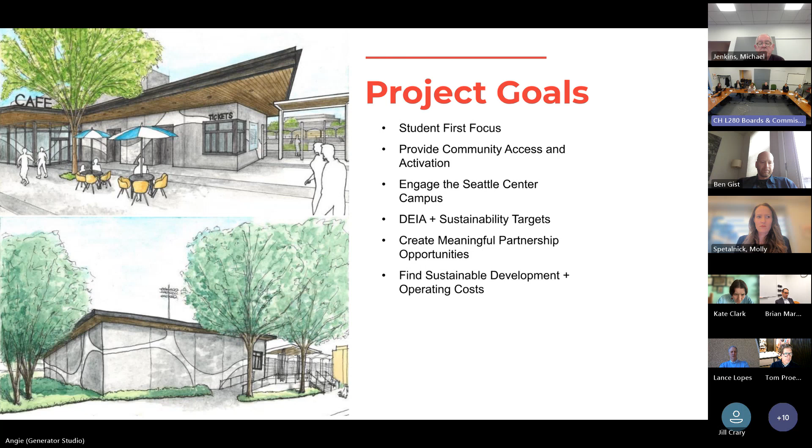And then our project principles: to develop a world-class stadium for Seattle's youth and community, an outside-in design approach, which really focuses on integrating into the Seattle Center context, providing community spaces supported by flexible amenities.

Celebrating students through art, activation, and technology, and then, obviously, restoring the memorial wall and providing it a pride of place it does not have today.

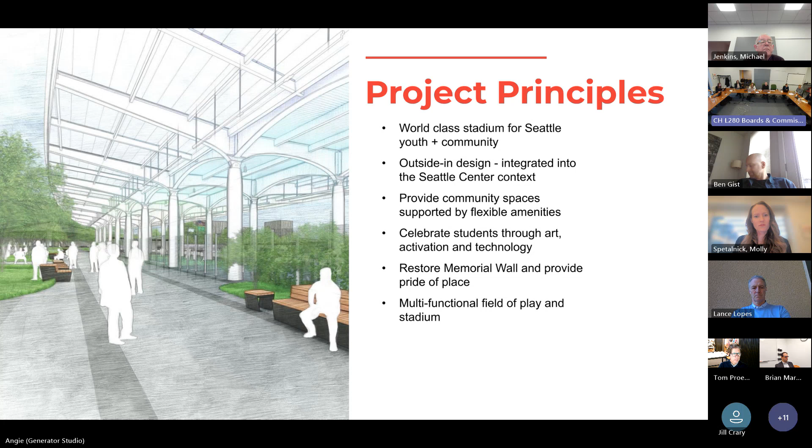And then, obviously, we can't lose sight of the bare minimum here: creating a multifunctional field of play and stadium for the Seattle Public Schools. Throughout the stadium design piece of this, we're going to call back to these goals and principles.

So getting into the stadium program and design, we're going to start with the recommendations we received from this group following our October presentation. We wanted to make sure we gave this a close look as we jump into what we're sharing today. As Brad mentioned, continued engagement is key for this project.

Evaluating feasibility, including public art infrastructure costs in the project budget. Study and clearly identify pedestrian and bike routes. I know Barb's going to show you some exhibits on that today.

Continuing the Indigenous engagement. For our corner buildings, consider opening to the exterior, evaluating the impact on the Center, and consider material choices for friendliness if programming doesn't allow for opening.

And then, sixth, enhancing the community engagement, again, what Brad touched on with their extensive efforts there.

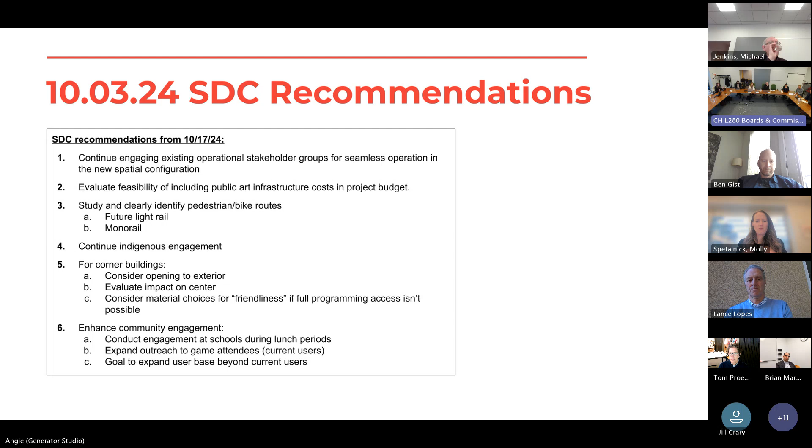So looking at our corner pavilions, the objective here, and we touched on this last time, was really to push these pavilions to the corners of the site so we can maximize the flexibility of our concourse, while also allowing for porosity and activation to the campus, creating these large openings to the east, south, and west.

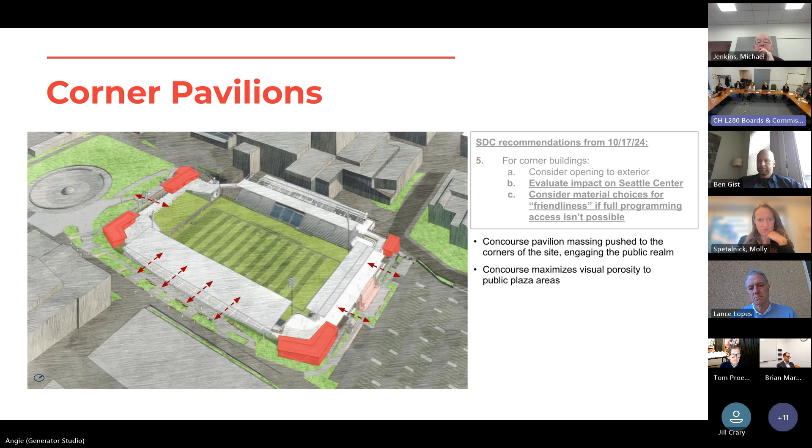So looking at these corner pavilions from the campus-facing side, a big development since we last met is these walls - we've studied the use of precast concrete, which has an extensive use on campus and a history within the center as being a cost-effective, expressive, and quick to erect and construct technology. And engaging with the campus with that building material and also the expressive nature that the forming of that concrete allows for.

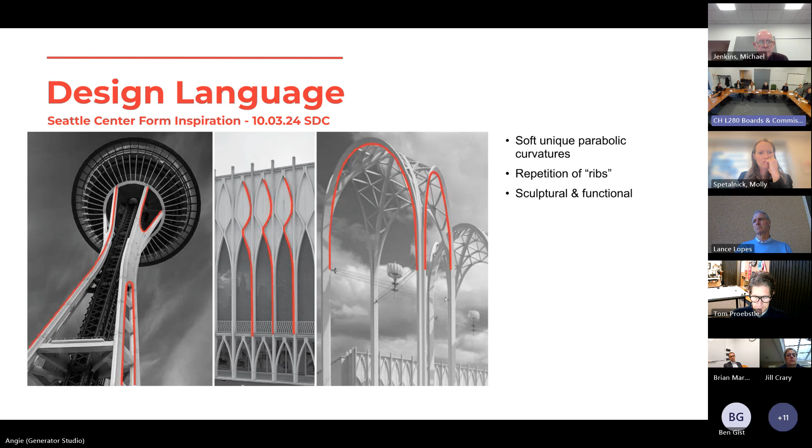So a callback to our last presentation where we talked a little bit about our canopy design and the inspiration that they've taken from a larger center context with these expressive sculptural and also functional, in some cases, forms. And so for these precast walls, go to the next.

We're taking a similar approach and studying the use of precast throughout the campus, both in structural and expressive ways. Came across this quote from the progress engineer from the original World's Fair construction site, where they really focus on the beauty that's achievable with a simple technology, and that beauty does not have to come at a cost. And I love this quote where they call the architects adequate and the engineers brilliant.

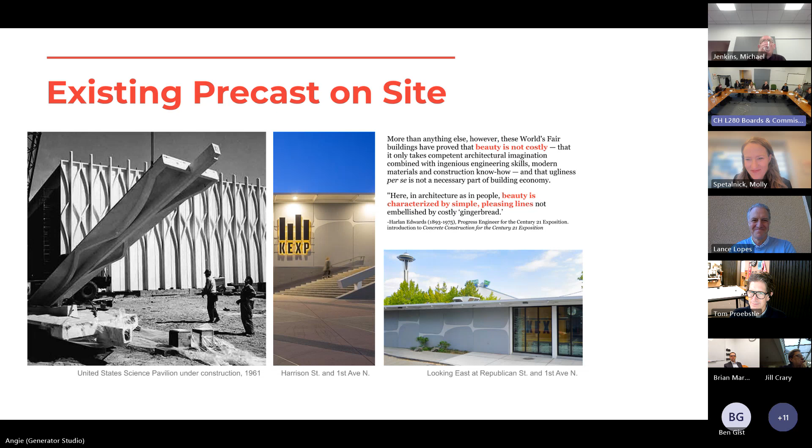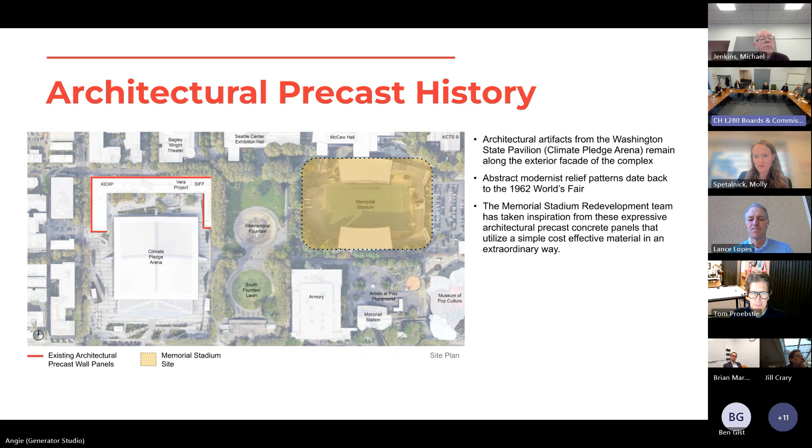So a little bit of a broader look here, looking kind of zoomed in on our site, but also including Climate Pledge and larger campus context. We've highlighted in red here the use of one of these precast panel types. That's really a simple system - it's a panelized precast panel with an inset at its exterior face that allows for forms to be created in a very simple, cost-effective way.

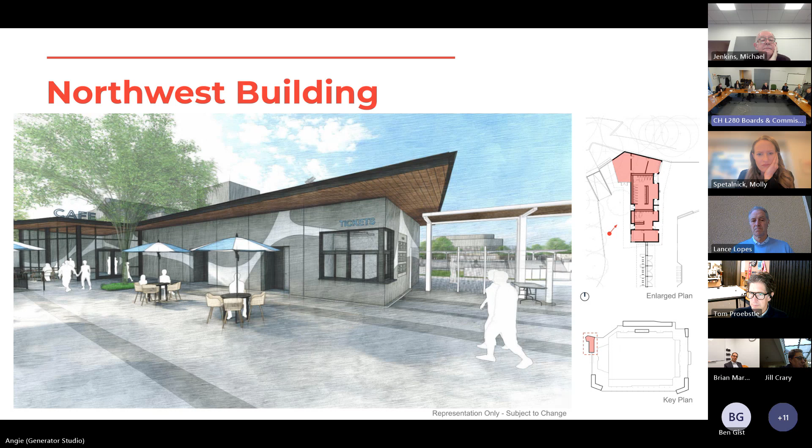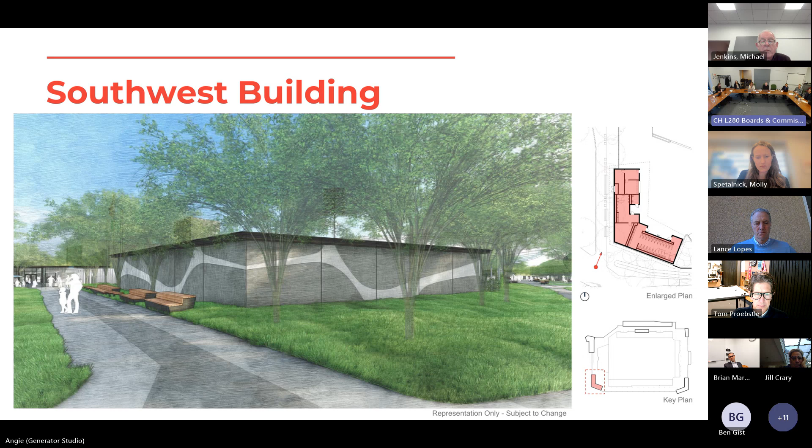We jump to the southwest - again, the same pattern wrapping around the corner of that building. I think the next slide is kind of a backed up version of this view where you can start to see Harrison Street, that roof canopy, and if you look really closely, Climate Pledge Arena in the background there.

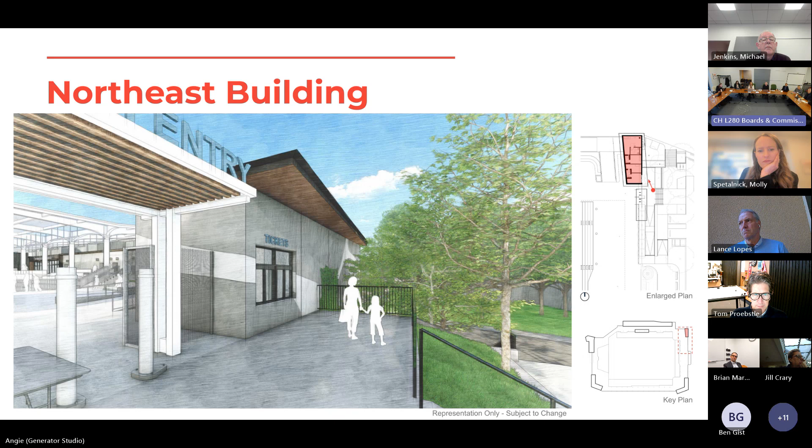And then this is that northeast building, which is actually a pretty modest little building, a little ticket window and some services on the inside of the concourse.

And so the interior faces of these pavilions take on a completely different life. And this is where we did touch on last time, where we are looking to provide these full-scale art walls for students to have representation and expression opportunities, celebrating those students through art, activation, and technology. Again, a project goal.

These spaces would flank our community spaces that are at each of these four corners and meant to be flexible amenities.

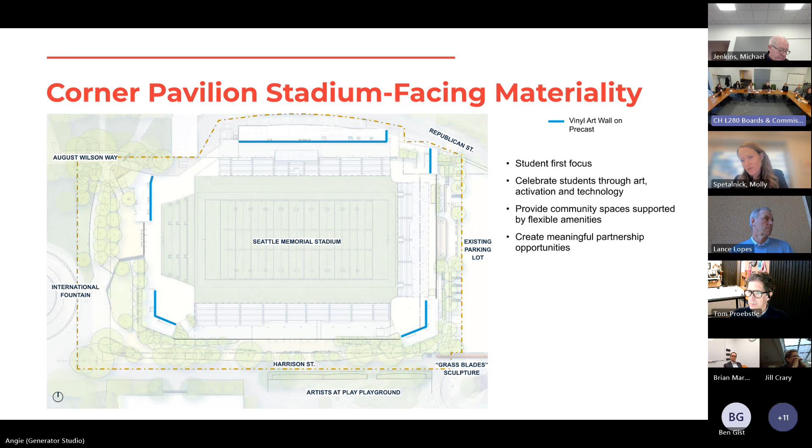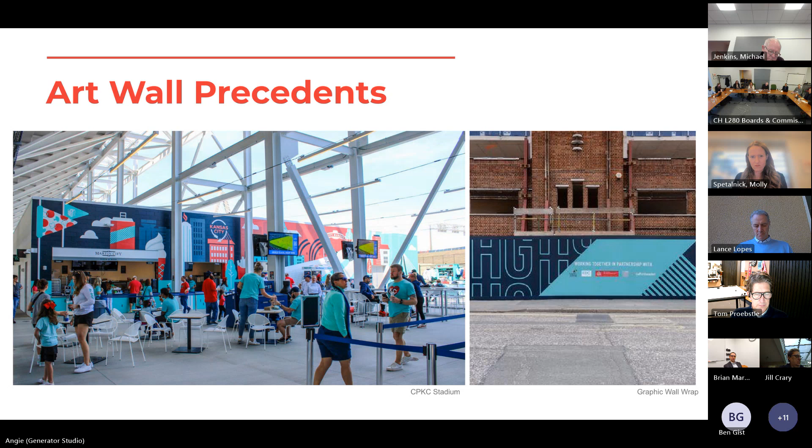Looking at other applications, this is kind of a collage of some what I would call art walls, a few back home in Kansas City, a few from here. And I think across the country, we're starting to see a lot of this application of large scale art on surfaces that weren't really intended for that, but they do take on their own life. What we're talking about here is a day one application of this type of graphic and art.

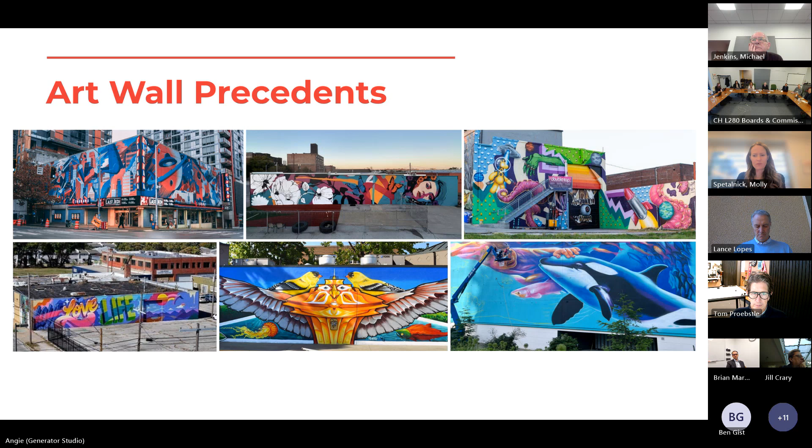We're going to jump to the west exterior activations, and I've included here some of those recommendations from October. The big ones we address at this corner of the project are listed here: the feasibility of including public art into the project, and considering opening to the exterior with these corner buildings.

We talked a bit about it already, but the cafe at the very north end of this building is a new activation that would not be operated by the stadium. It would be operated by a third party. But we see that as a great opportunity at that corner to really engage with the campus, facing out toward the international lawn.

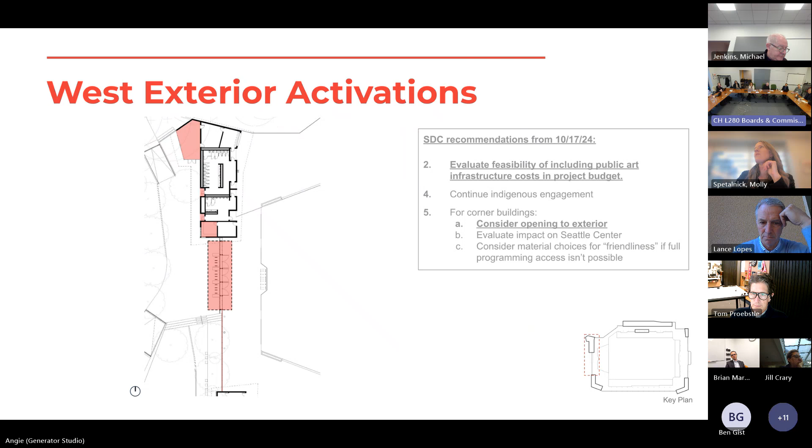We also have restroom entries to this building, highlighted in red. Then we have a large entry gate along this west concourse that would be more focused for community events. The SPS gates that will be used are along the east, which is how they operate the stadium today, and that'll remain. South of that, you can see a red line, a section of fencing we're looking at for a custom patterned application, an art opportunity for an installation, potentially through an indigenous group here in Seattle.

So we'll look at each of those pieces here. This is that west entry. We kept this gate structure pretty simple. It sort of is an extension more of the fence line, that entry gate, than it is the architecture, giving a little coverage for staff operating these gates and for queuing. You can see here too, we've identified a location for a donor wall just adjacent to this entry.

This is that fence panel installation opportunity I mentioned. It's a bit of a tricky corner here because of the site grading. Where we're standing in this view, we're about 7 feet above the concourse elevation. So with this fence, we want to have roughly a 50% opacity so that you're not getting what SPS would call a cheapskate view into the facility, but you're able to have a sense that there's an event happening and it's an active site on campus.

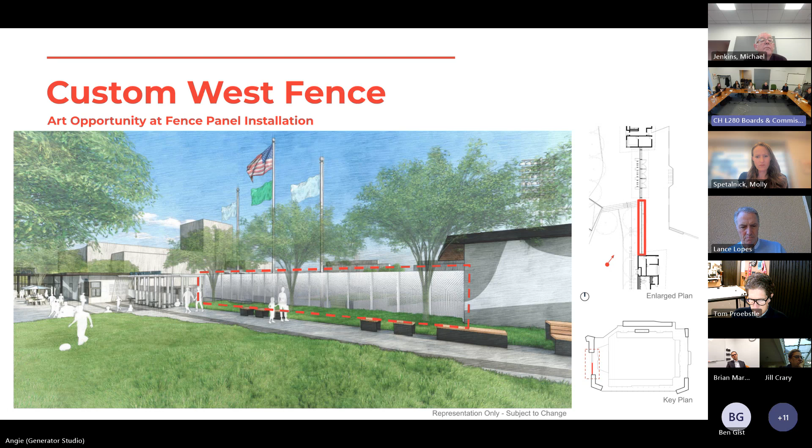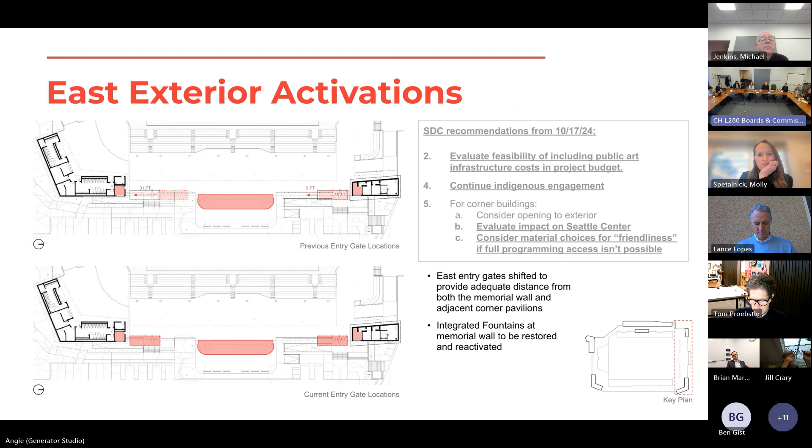Then we jump to the east side of the site, where there are just a couple of tweaks on this side of the project that again call back to some of the SDC recommendations and our project goals of giving Memorial Stadium a good pride of place. We've slightly shifted the layout - the two plans on the left show the upper as a previous layout, and the lower left is the updated layout, where we've shifted those entry gates away from the wall to give it a nice moment to itself.

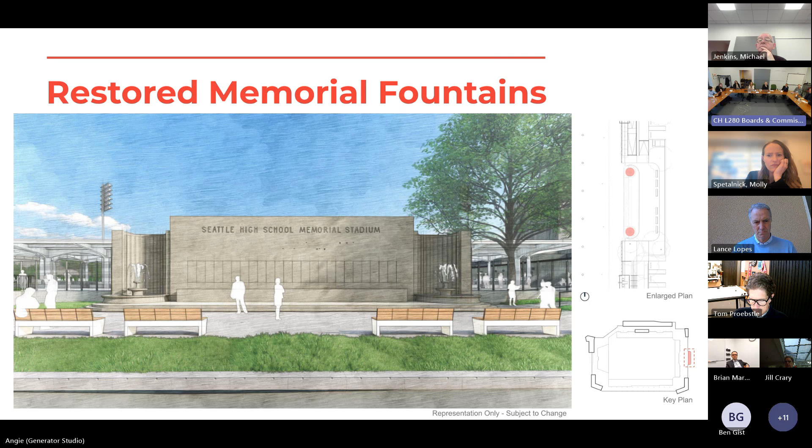And just a brief mention of the memorial wall itself. I know Barb's going to look at this a little bit later. Just a view showing that we've kind of cleared out space on both sides to really let it stand apart and have its own moment here.

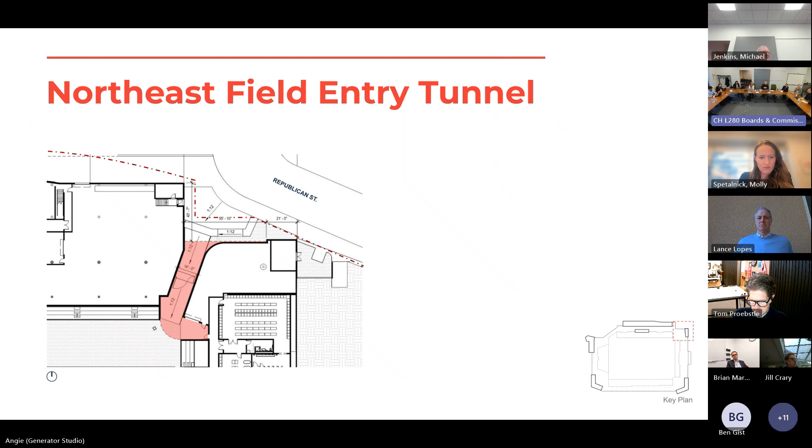Okay, so we'll talk a little bit about sustainability. As John mentioned in the project vision, sustainability has been one of our priorities on this project. As designers, obviously with the changing environment, it's important to us, but it's very interesting to hear from the students in our student engagement that it's something that's very important to them as well. In our previous presentations, we've had very conceptual ideas of how we'd achieve a sustainable design. And now we're at the point in our design process where we actually have requirements that we need to meet in order to meet code and in order to meet our LEED Silver goals.

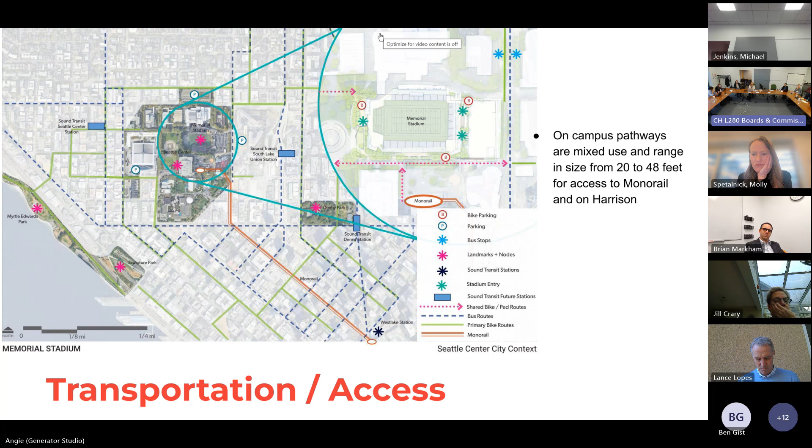You had asked us to talk a little bit about pedestrian and bike access to the stadium coming from the monorail and also from Harrison, and we've done a little enlargement here. I think one of the things about Seattle Center is it has these significant pathways which are not segregated by use type. So coming from the monorail and also Harrison, the widths of those vary, but they go from about 20 to upwards of 48 feet, and sometimes a little bit larger. So with the exception of when there's a major festival, free flow is available.

You also asked us to continue to work with Seattle Center on the issue of site programming, and also with the school district associated with that as well.

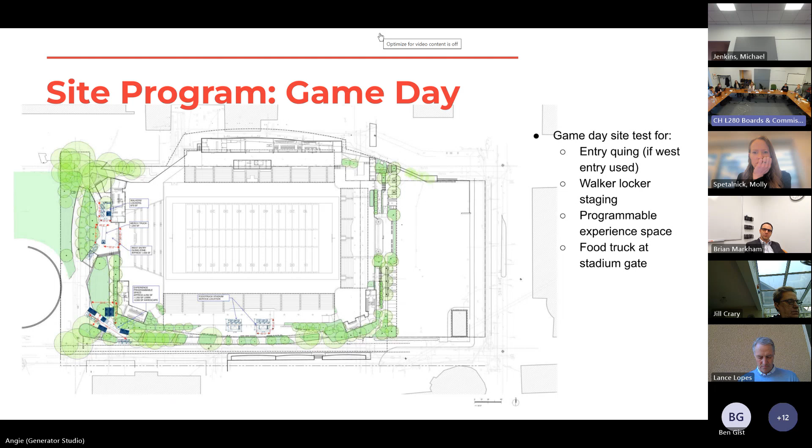We've gone through a process of really cross-checking the design against this array of activities. So we have a game day condition with things like food trucks and queuing areas. We have school events, whether it's a classroom, presentation, or performance. And Seattle Center festivals, using the Bite of Seattle as the basis for looking at this. With this particular study and layout, we're exceeding that current level of tents.

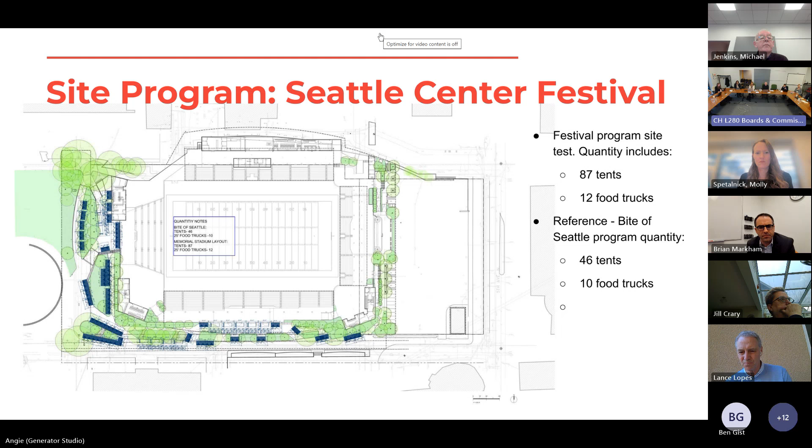We're going to be meeting again with the Seattle Center Event Group on the 23rd to cycle through that, and obviously these diagrams are a high level. They have been testing siting, etc.

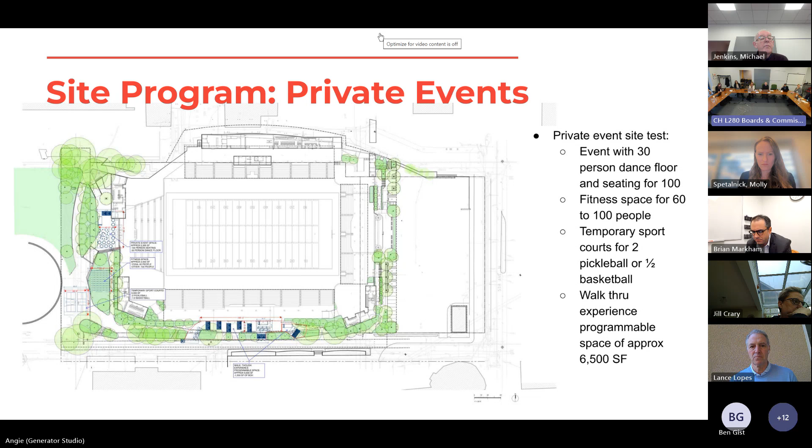Large events could be a beer garden or an event with a stage for 250 people. Private events could be a small gathering, use of the site for fitness, or a presentation of some kind. We've also been keeping track of vehicular movement through the site to make sure this is going to work well in the future and meet the demands.

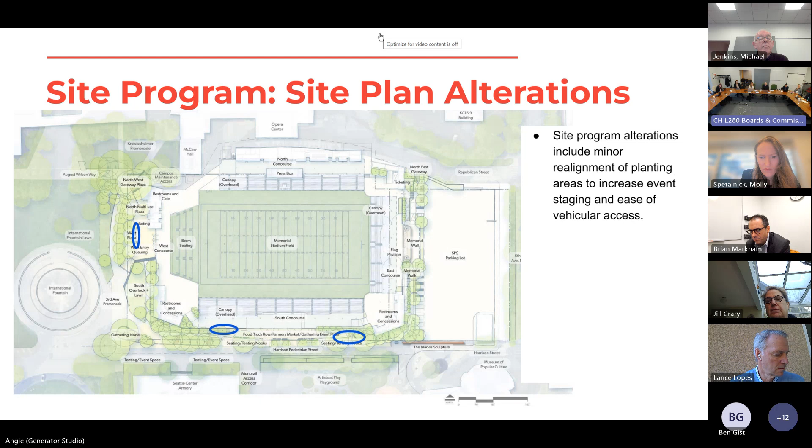I do want to note that there are three small areas where we are shifting pedestrian pavement to increase it in support of event use and vehicular access. So there are just some slight shifts occurring on this. Here's a site plan.

I want to walk you down through the 3rd Avenue Promenade. That has been asked as a question, and I think it's really quite interesting. So this sequence goes north, starting at Thomas. The configuration of this experience between Thomas and Harrison is one of a strong allee of trees, and it terminates at this interesting junction where Harrison meets 3rd.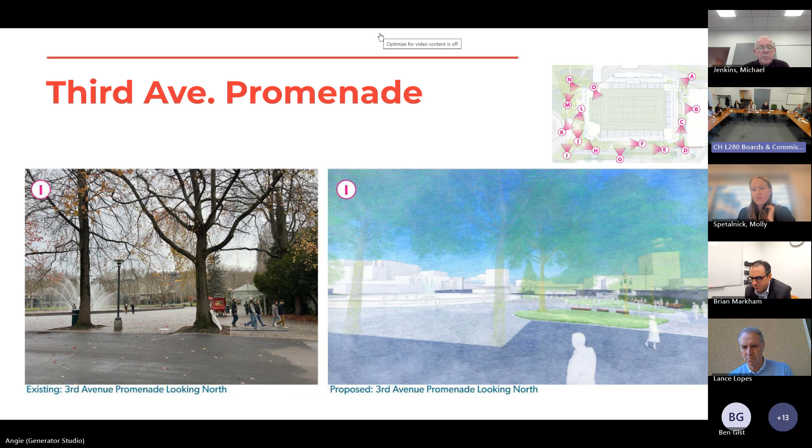And then you can see in the image on the right, this area really opens up. Much of the understory is going away. It's going to be a relatively low ground plane position, so as you walk up, you can really do a broad scan and select your path through. It really changes the relationship, I think, to some degree with the fountain, really bringing it in.

Now, this is if you were continuing down what is going to be an arced Third Avenue promenade, to the west of the current covered walkway. And again, the extension of the fountain lawn rolls down toward the stadium entry plaza. This descends down the slope at approximately a 4.5 to 5% slope and lands us at the intersection of August Wilson Way.

And that arced wall and arced trench drain of Kreielsheimer Plaza come out. So there is a call and response between the arc wall of Kreielsheimer Plaza and the one that we're proposing.

So we really have almost two experiential characteristics in terms of lengths. One, which is the strong allee between Thomas and Harrison. The second is between Harrison and August Wilson Way, which is really more of a landscape experience where the walkway is set into the rolling plain of the International Fountain. And then we have two knuckles, one at August Wilson Way and one at Harrison.

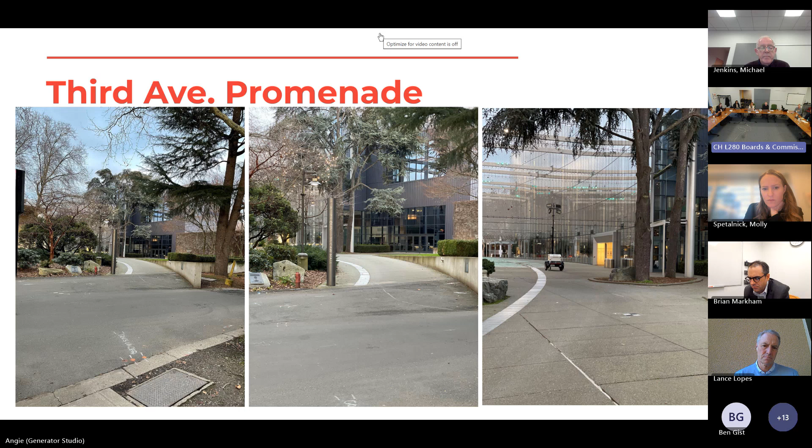Okay, we are going to go to a video. Can you take me to a video? So we all hold our breath.

Oh my God. So we did a fly through last time and found it really helpful, and before we go into the details of this, we wanted to do another one. So this reflects the changes.

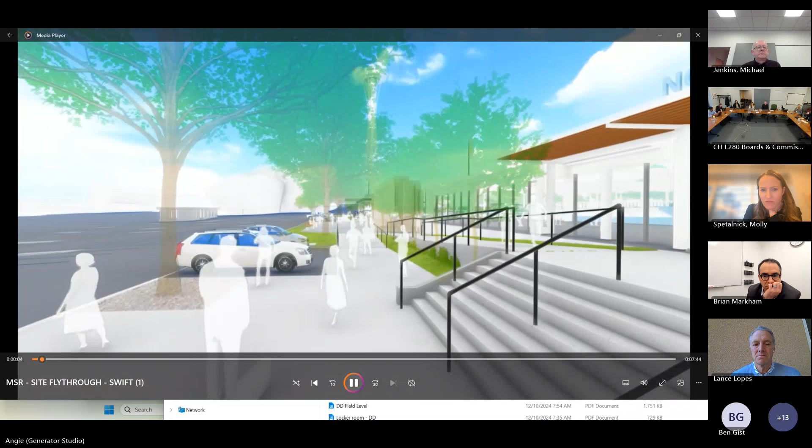We're starting in the northeast, walking to the south along what will be a community walk. You can see the Space Needle in the distance. We're coming up upon the memorial wall. We're going to rotate out. We were able to create a plaza in front of the memorial wall by deleting some parking.

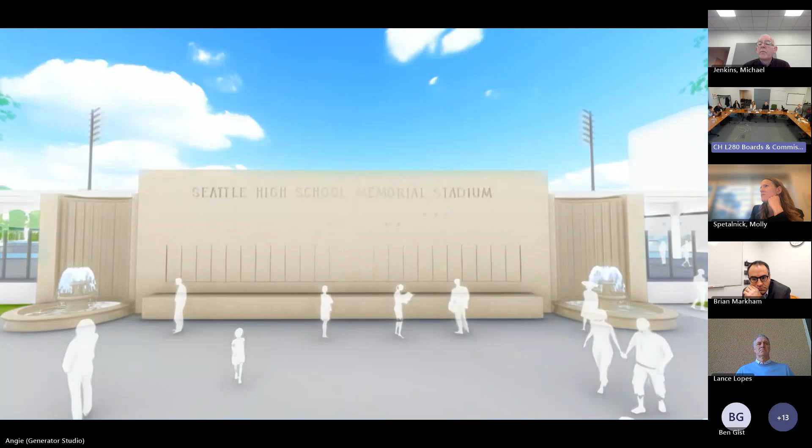And again, the grade change between the outside and the inside is roughly 4 feet, so when you're standing out in that plaza, you're going to feel a physical connection to the concourse. It's a really different circumstance. So we're continuing to the south. As John said, the entries have shifted, so they're more proportionally arranged around the memorial.

You can see seating steps, and this is kind of squished east and west for some reason. So you're continuing to walk toward Harrison, and again we have trees creating a separation between parking and the walkway. Now we're going to come to Harrison and do a rotation and begin to go down the Harrison corridor.

This sets you up for long views down that corridor of Climate Pledge Arena. So we have a corridor which is treed for entry movement and vehicular movement, and then this area adjacent to the fence line, which is set up for activities that support inside the stadium as well as outside with lots of seating.

You can begin to see some bands of pavement - we'll talk about that later. We're going to be doing a sequence of rain gardens in this planting area, and then there's a group of redbuds. You'll see an image of this later. We're going to be extending that line out so that Harrison has that as an identifying characteristic.

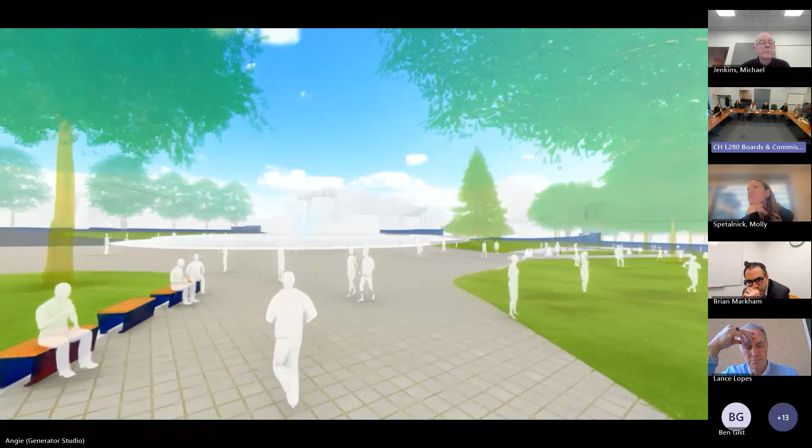It really brings that through to you, and you begin to see here a change in the pavement to a darker gray. We're saving all of the existing paving around the fountain and reusing it to bring it down Harrison to extend that sense of the fountain district.

So we're moving toward that, and we're going to begin to go down the Third Avenue Arc Promenade. There's grass on the right, and as John said, it is elevated, and that was part of those early conversations with you about making sure that that sense of the fountain district extended to the...

...toward the stadium. So we're dropping down the grade. The grade change varies along here, and it begins to come down to be almost at the same elevation as the entry plaza, and then drops below. But at August Wilson Way, it's about 2.5 to 3 feet lower than that entry plaza. So you still feel as if you're part of this larger area.

So now we're getting to the knuckle at August Wilson Way. August Wilson Way right now feels like a group of corridors that intersect at this location. With the cafe and the seating and creating a little bit more breathing space, keeping all of those large legacy trees, it really turns it into a gathering space. So it's a knuckle now.

So now we're going up that sloped walk, and you can see the lawn area on the right that is going to be used for event staging. This takes us into a smaller area that could be used for smaller events, and really, if needed, if you're doing a beer event, you could cordon it off to the entry at the stadium. Then the steps lead you up to that elevated grass plain, and again those are used as stadium seating, amphitheater seating, as well as a step.

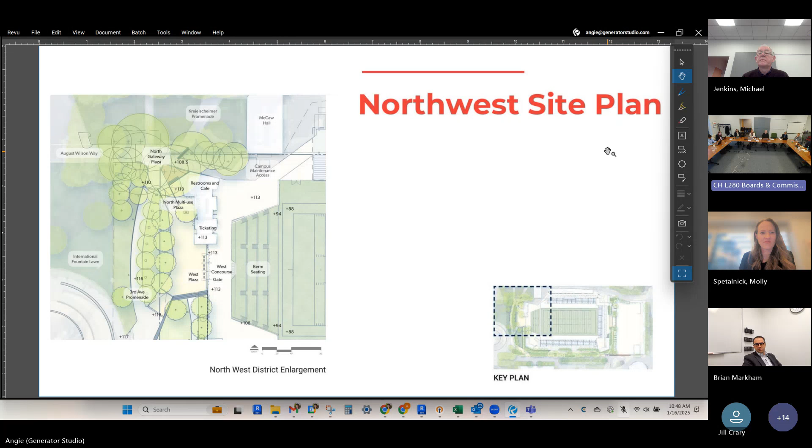Maybe keeps going. Okay, we're going to start in the Northwest. I've already talked about much of this, so what I'm going to do is talk you through a series of before and after images. If you were on the concourse, this is what you would see. Really, the lightness of that canopy, the ability to see underneath it, really changes your sense of views of those major landmarks.

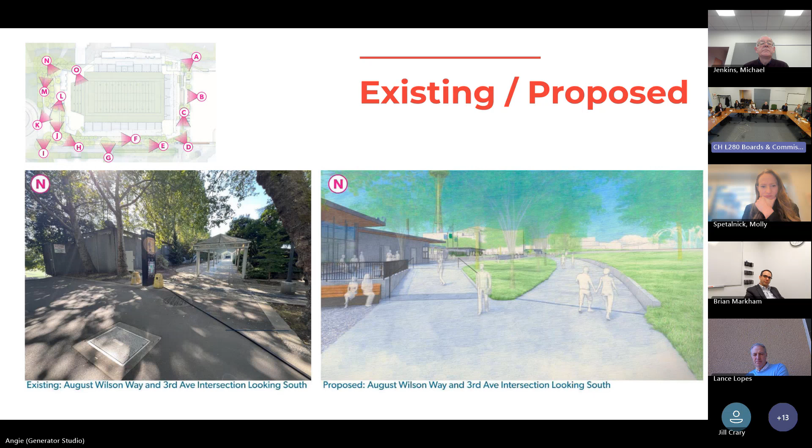I've talked at some length about this, but if you look at the image on the left versus the right, this is really beginning to calm down. All of the elements are there: claim back space, make it attractive and usable and engaging, and invite people to use it.

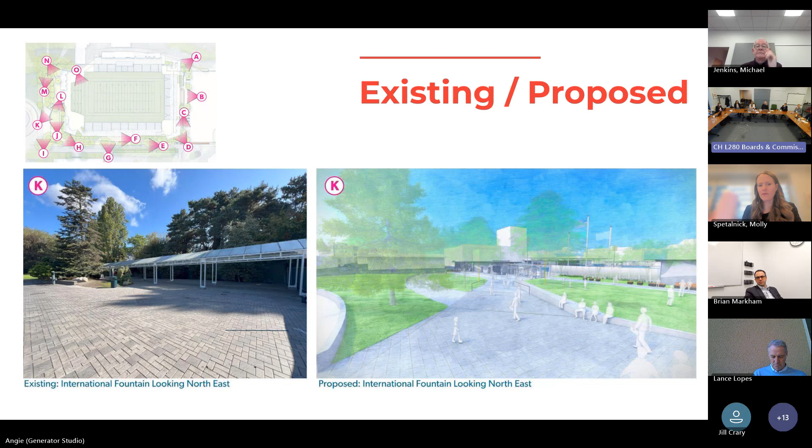Again, with the covered canopy gone and opening up that space with a connection to the fountain, this changes significantly. In the southwest corner, I'm going to walk you through again some more before and afters. If you are at the fountain looking toward the stadium, right now you have the covered canopy, the wall, the trees, which really constitute a barrier, and that's going to be all opened up.

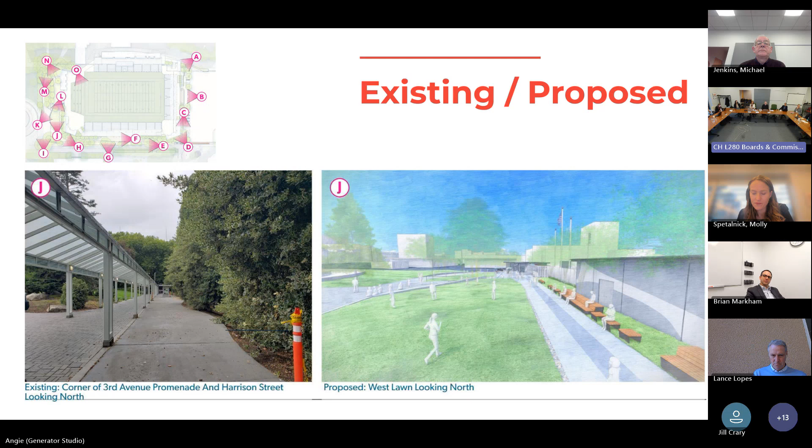And the plane of the fountain extends toward the east. This is looking back toward the north, down the area where there'll be all of the seating in that large gathering and lawn area.

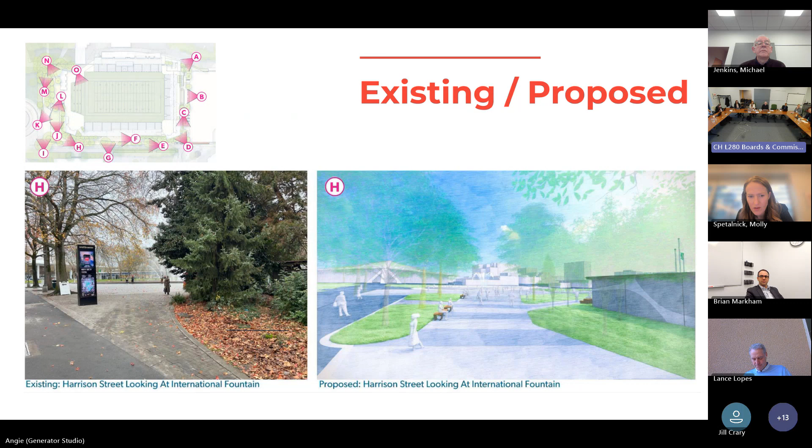If we go to the south site plan, I'm going to again take you through some before and after. We talked a bit about this, the change in the view and access to the fountain. The vegetation on the right, in terms of the density of it, is going to be going away, and that whole aperture opening up so you can see through to the fountain.

I think this view walking down from the monorail, this is a real game changer. I don't even know if I need to say anything about this. This is incredible. This is just incredible.

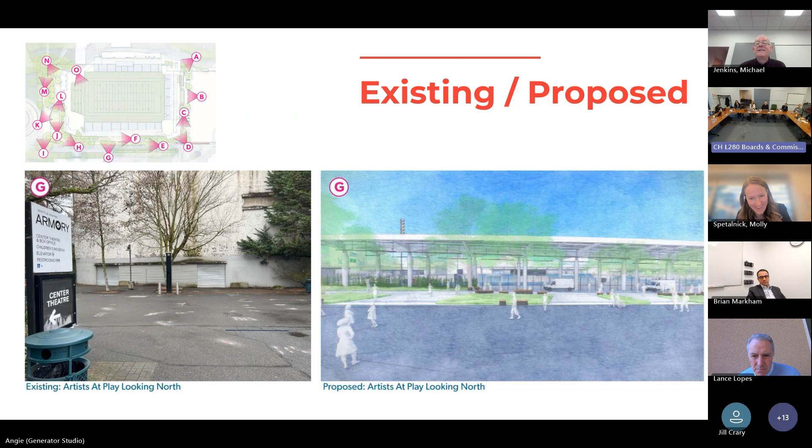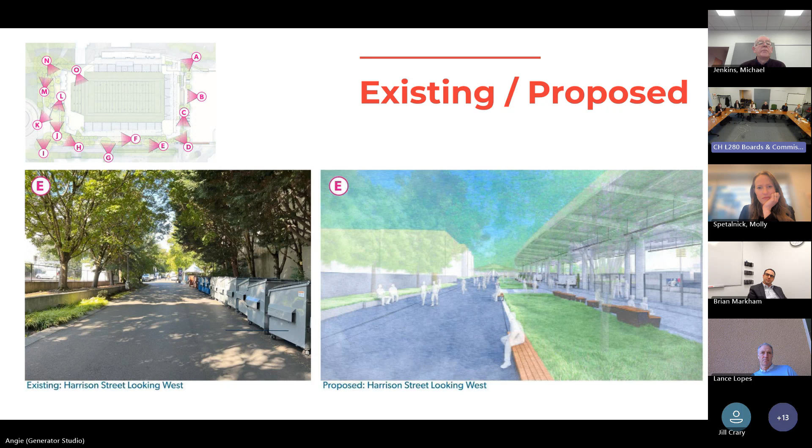This is really exciting. I think importantly, Harrison is one of the things that extends the sense of Seattle Center out to the east, really enhancing that corridor in terms of the clarity of both use and also the introduction of layers of activity. And tree canopy is really going to change the experience.

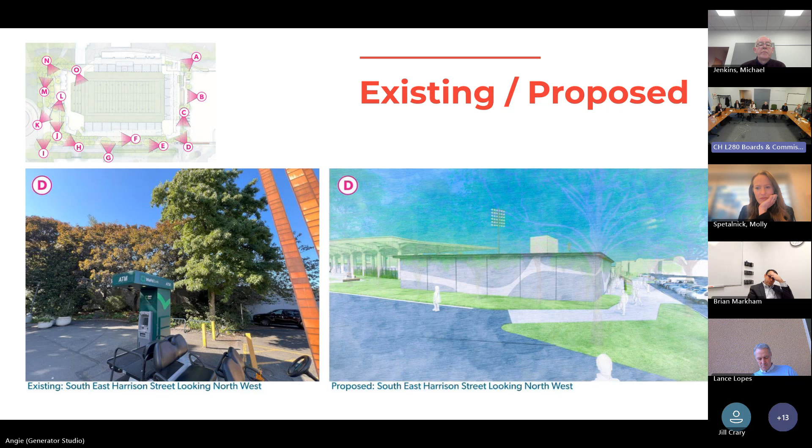So here we have the corner building that John talked about at the Blades. Again, things are going to calm down here, and that sense of entering the campus is going to really be more positive and occur earlier.

So I'm going to go into the east side. John talked a lot about some of the changes, and we may get quite quickly to the issue of the memorial. But we've already seen many of these images. I think this is really pulling the quality and the generosity of Seattle Center east, framing that parking lot.

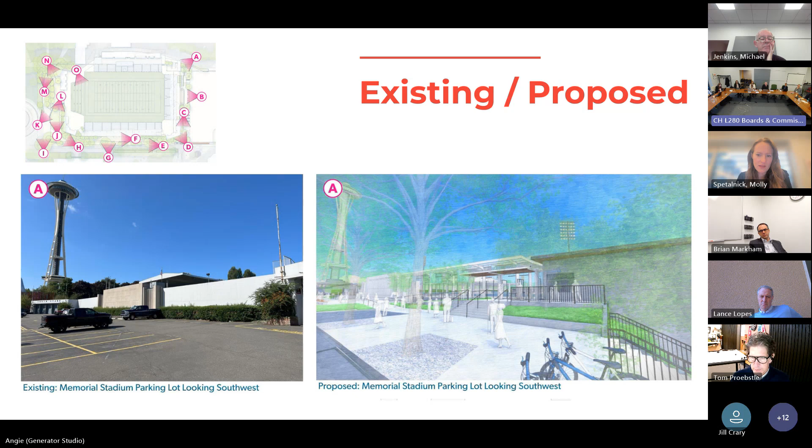Here we have a memorial. And then at the very north, that staircase on the very far right goes down to Republican, connecting north to Queen Anne. I want to touch on materials.

Starting at the bottom of the image, coming up, what we are doing is using the salvaged pavers, and then we are using concrete treated in a variety of ways: scoring to be able to shift the color of concrete, sandblasting, saw cut joints that result in a clean finish, and then the introduction of mica in selective places.

We are bringing in a whole sequence of benches, with wood and backs for everybody who needs to use this, obviously bike racks. And then we are using planting in a way where we are accentuating the seasonal change and the motion of plants, the increased characteristics of texture and pattern, so that this has a sense of scale to it throughout the season.

So early flowering plants and trees. There you see the pink, that's the redbud. Those are currently on the site. We have a beautiful clear yellow leaf in the fall.

We are using predominantly deciduous vines, so those again come and go, and you have the sense of transparency and opacity over the seasons.

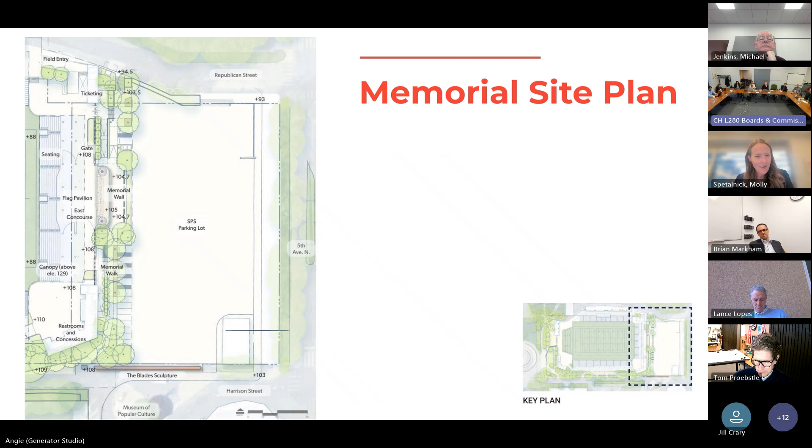And then let's come to the memorial site plan. Yesterday, at the end of the day, we had a meeting with Landmarks, and it resulted in enthusiastic support. Our next meeting with them is going to go for the certificate of approval, so that was really quite exciting.

But I want to describe some of the things that we are doing. ADA access throughout here, universal access is consistent and up to the fountains and the memorial wall. That's essential. That's been a guiding force.

The two fountains on the ends are being reactivated. As you can imagine, that's an interesting group of conversations. The wall itself, we thought there was a fountain there, but we've realized with more research, it was just a place for lighting, so the wall will be lit.

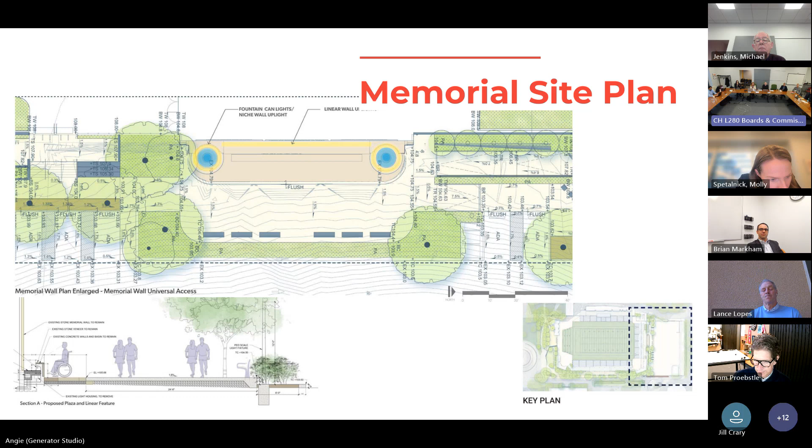So I think that's it. I'm gonna pass it to you. And you want to change places here? Let's do that. All right, so—

I think what we're gonna do is talk—some of this might be a bit of a repeat from our October meeting, but I wanted to restate some of these things because they are really the framework we're trying to run this design through, basically through the lens of lighting. A lot of these things, our number one job is to reinforce, and we're working within those project principles that John mentioned.

Our drivers here are obviously just designing the lighting so that the stadium integrates perfectly within the greater context of Seattle Center, and then also providing flexibility for both event and non-event conditions. I think Barb showed some of those layouts we were looking at in terms of potential events, and we're just making sure that we support those.

Also in non-event conditions, some of those open views we've been talking about—we really want to make sure those are reinforced even when there isn't activity inside the stadium. For us, lighting has a pretty big role to play in creating legible wayfinding after dark, so we'll talk a little about how we're planning to do that.

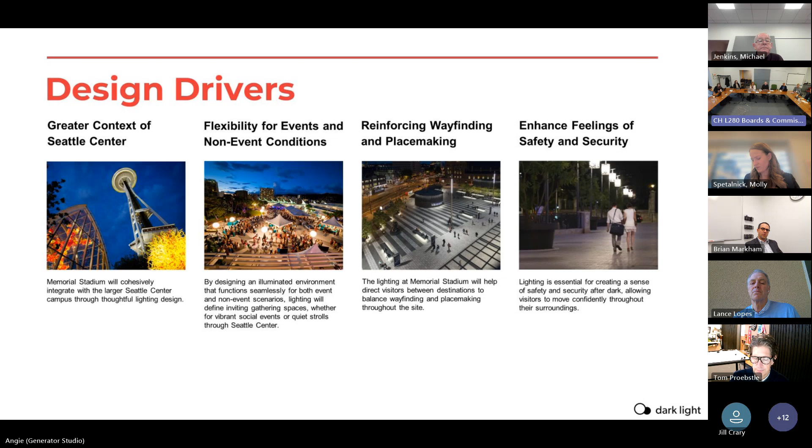Also supporting placemaking through creating really comfortable spaces for people to gather, supporting other elements like benches and things like that. And then the number one thing everybody asks us about, and we know is our number one job, is enhancing those feelings of safety and security so people can be confident moving around campus.

So the stadium obviously holds a pretty prominent spot here on campus. And then within that larger context, you can see how lighting starts to play a part in creating these spaces and landmarks for the city across campus through lighting.

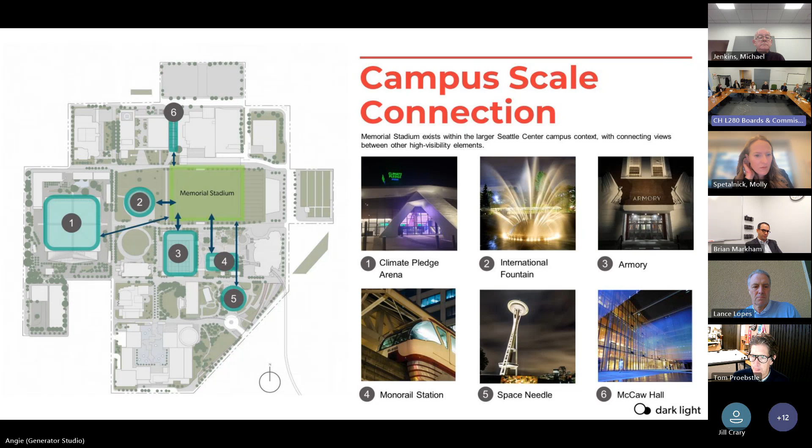For us, we really think about how spaces always exist in the context of how people experience them during the day and then after dark. That's especially true here. You can see these different experiences, and we think that's actually great when people walk through. At this point, we were out there on campus a few weeks ago—it was about 5 and it was already dark, so this isn't necessarily a late-night type of thing from the experiential standpoint.

Our goals are that a lot of these lighting contexts start to create depth around the campus and highlight things differently than you might see them during the day under the broad swath of daylight. So we will definitely be working to follow in that context.

One thing I want to point out is that lighting really does help define the bounds of space after dark. One of the things we're really mindful about is that having light on vertical surfaces, which you can see a lot of in this imagery, is really important to people as they experience space, because if there isn't something lit in the distance, it can really start to feel like darkness closes down on you.

The trick for lighting designers is people say all the time, can you show me what a foot candle looks like? And the answer is no, it's really hard to capture. Phone cameras love to brighten things up beyond where they are, so we actually brought the brightness on this down to approximate what we think the experience feels like. But obviously this is a little snip — when you're out there, there's the surround and things like that.

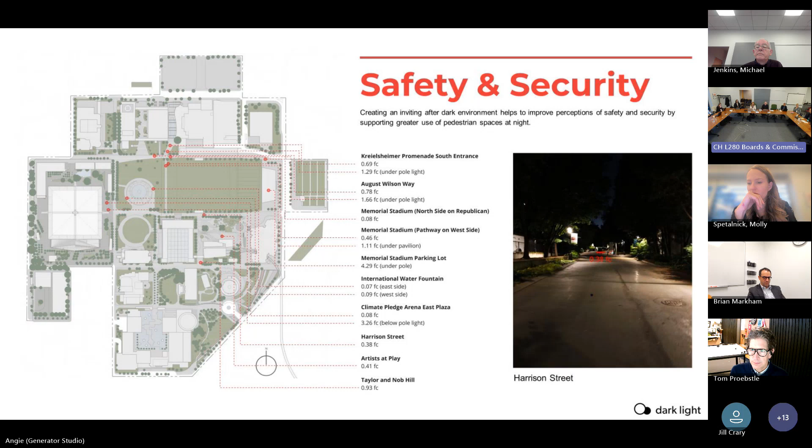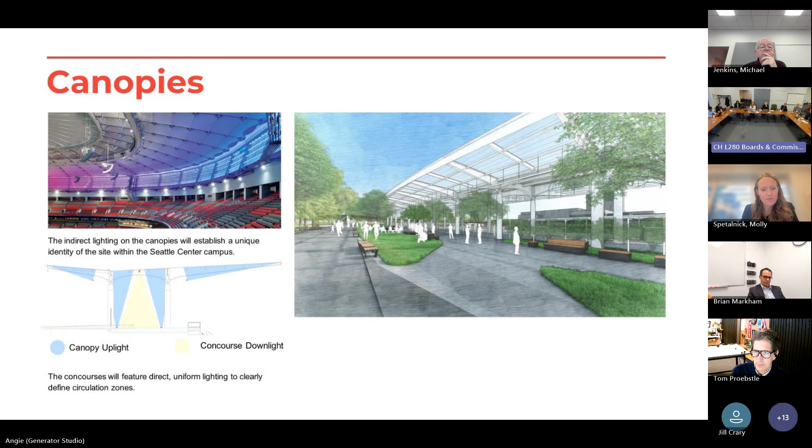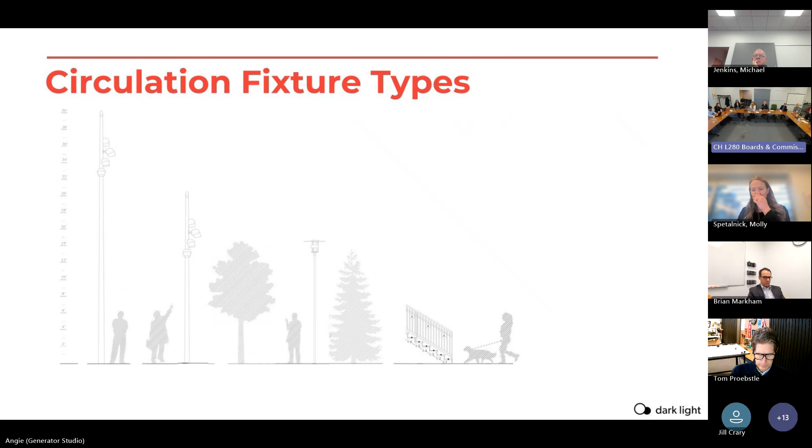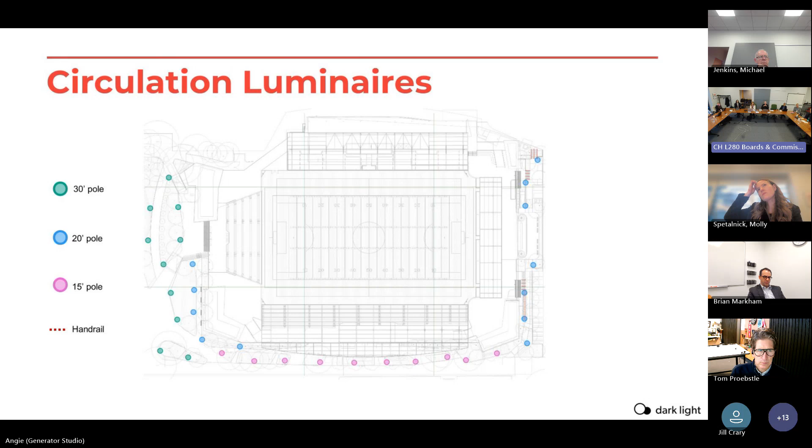What we're looking at on the east and west is going to be more of that shielded light source, because on the east side we really want the memorial wall to be the focus instead of these bright little dots — which are very helpful across campus in helping you understand where those other circulation pathways are. On the west, again, we're looking for something more shielded, because what we're really trying to do is not have the buffer between the west side of the stadium and the fountain be about the light fixture itself. So we're looking at something shielded. There's context for this on campus at the Arena Plaza — it's a similar type of strategy that's used there.

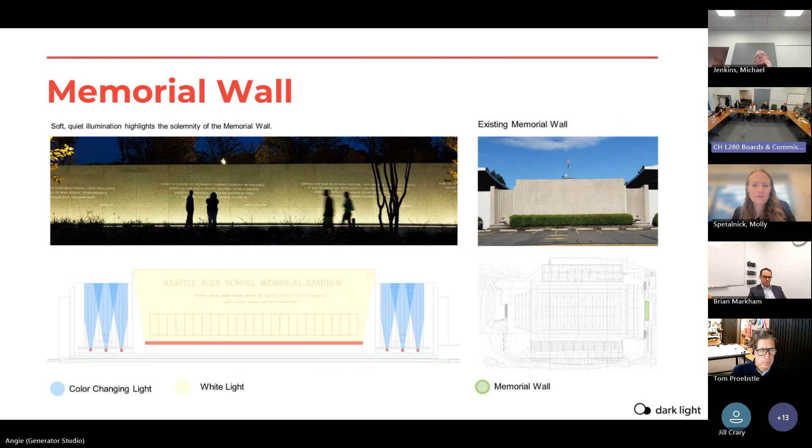For the memorial wall, we're just really excited to be able to install lighting that hasn't been functional, we think, since about a couple years after it was originally installed — to support that placemaking and presence we're looking at with that new plaza. And with the water features being restored, we're also providing lighting for those, which will also fill those fluted reveals on each side. And that's what we've done.

Thank you. Okay, oh wow.

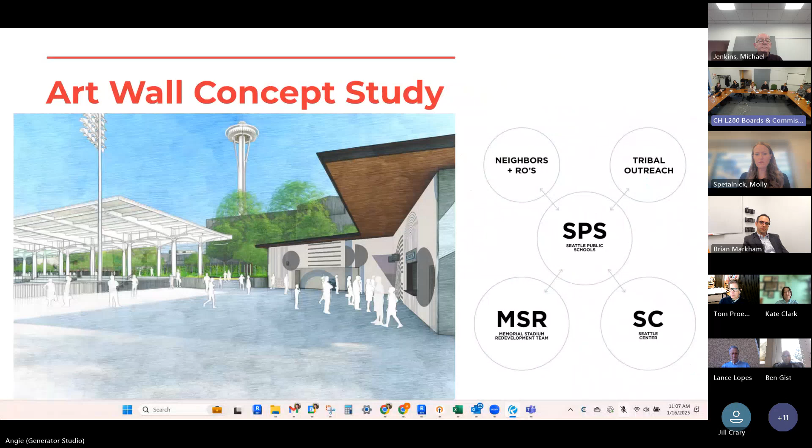Sure. So these walls, if you recall in our previous presentation, we began looking at them as pretty modest CMU construction pavilion buildings. Through the design process and comments from this group and others, we realized that the precast material used on campus is pretty extensive, and the reasons they use it are the same reasons we can use it now - it's a cost-effective way of creating a materiality and expression that looks more expensive than it is. So instead of a double-width CMU with insulation, this is two concrete pours essentially with an insulated cavity between, as one unit that gets assembled like Lego blocks. It's actually for our construction partners a cost-neutral design change. We think it does a lot for us, and it's a good opportunity to be more expressive with these pavilion buildings, giving them a character that's tough to achieve with CMU construction.

The pattern itself is still under development. What we're showing today is a direction we were liking, but we're still working through the process with our stakeholders and user groups to get feedback on the pattern itself.

Could you broadly speak to what the pattern represents, or what its imagery connects to? Yeah, I think it's similar to our canopy structures in the use of the parabolic curve as an expressive element. It plays with the idea of masses and void spaces, where what you see in white would be recessed into the concrete. You'd end up with this pattern as a color and also as a bit of a shadow line as it plays around each of these corner buildings as a cohesive language that even wraps around to that northeast player entry tunnel. It's a good opportunity to give the stadium an overall brand, as part of the signage, wayfinding, and the overall character of the new stadium.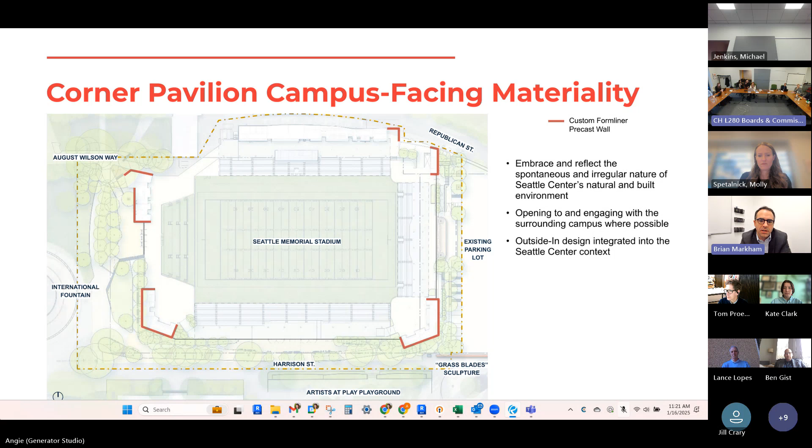There was one slide at the very beginning in the public art slide that I think was an outdated render, and it seemed very different from the rest of the presentation. So I just wanted to figure out where that is, like, where is this?

That's the player entrance, right? This is the northeast player entry tunnel down on Republican. Yeah, the player entrance. This seemed like much larger buildings than I was expecting, but in that one corner, I think it is appropriate, right? I think that was my only question.

I rather enjoy sort of the angularity of the buildings now. And I just, as you solidify, I would even look at the main canopy and that big long sweeping curve as to whether that needs to stay curved or not. But that's up to the designer as an aesthetic choice. And I will be very happy with the stadium as currently shown. So I cede my time.

Thanks, Brian. Jill?

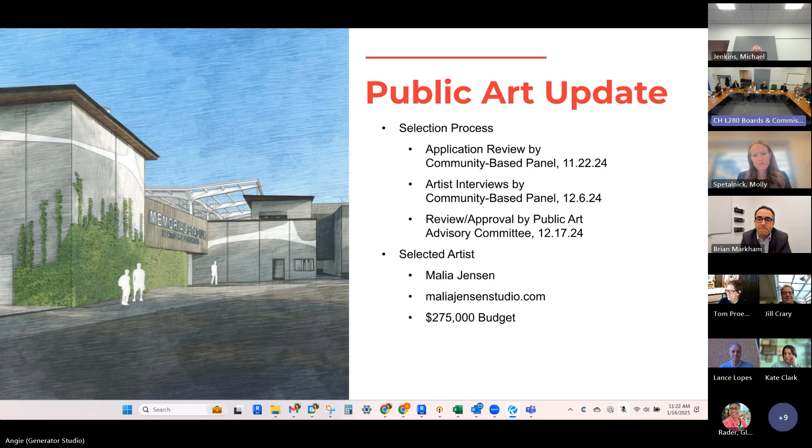Thanks, I'm really excited to see this, it's really evolved nicely. I'm gonna ask Kate to jump in if I get into some things that she wants to add more to, because she and I both are on the Public Art Advisory Committee, and we've talked about this project there multiple times.

So you just had the slide up with the $275,000 budget. When we first saw that at the PAC, my memory was it was a $250,000 budget. We asked a lot of questions about how 1% for art of a $40 million city contribution ended up with only $250,000 for the art. One of the things we learned was that the arts office had a certain overhead rate, and so Kate and I, with some other people on this committee, pushed on them to lower their overhead rate, which they did, which I think is what brought it to 275.

We also learned that Seattle Center hadn't turned over the full 1% amount for various reasons. So, David, I feel obligated that if we're going to push on the arts office, we need to also ask Seattle Center if they couldn't find a way, given the importance of this project and the fact that the 1% contribution is only on the city portion—so proportionally to the whole project it's somewhat small—if there isn't some way Seattle Center couldn't find a way to chip in the full 1% amount rather than withholding some of it.

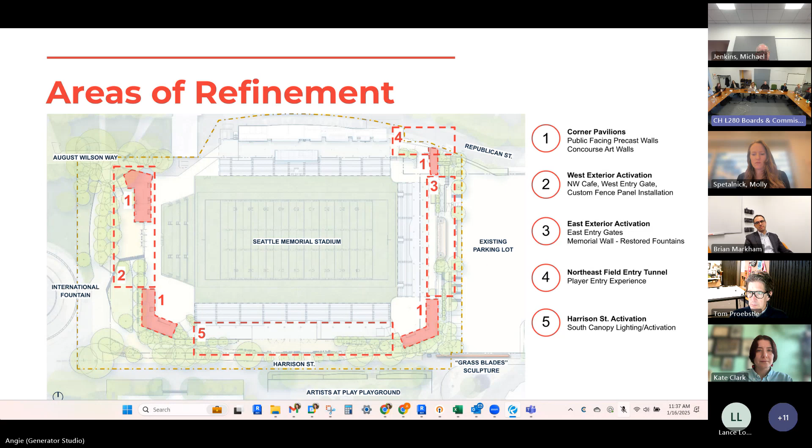I'm wondering if you could go to the area plan for the Southwest. This is a great question, so we've done a whole series of studies at Harrison. Keep going here, you're real close. You're getting close, this next sequence.

So I'm gonna try and do this old school. There's sort of 2 layers of this, maybe 3 layers. One is how much do you have to work with, and making sure you take a percentage of that and figure it's going to be lost.

So the next layer is acknowledging this whole international fountain, and I'll say the table mat of paving it sits on, to use a metaphor. So we're bringing that table mat right out in here, and then bringing it over here. This to me is the question of how far do you bring it and how far don't you, and it's really a feeling gut thing more than a rational thing.

Yeah, the table mat is a more rational thing, and I believe the other extent is to approximately here. I'd acknowledge you're identifying one of those things that's part of a cost discussion we're going to be having. That line is probably going to wiggle around a little bit, but that's the framework for the thinking.

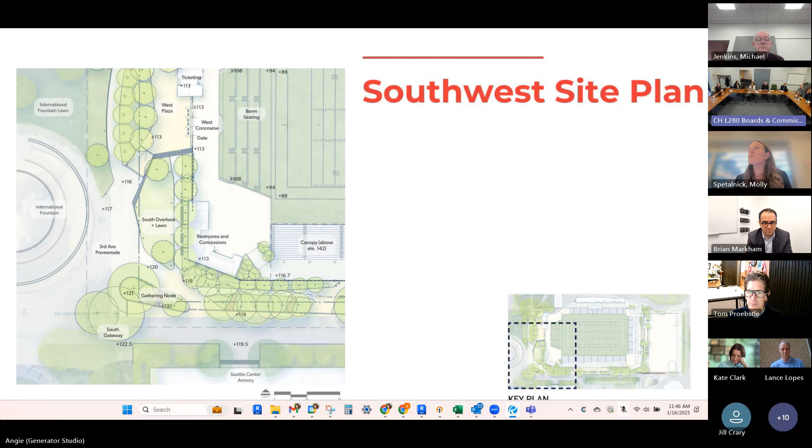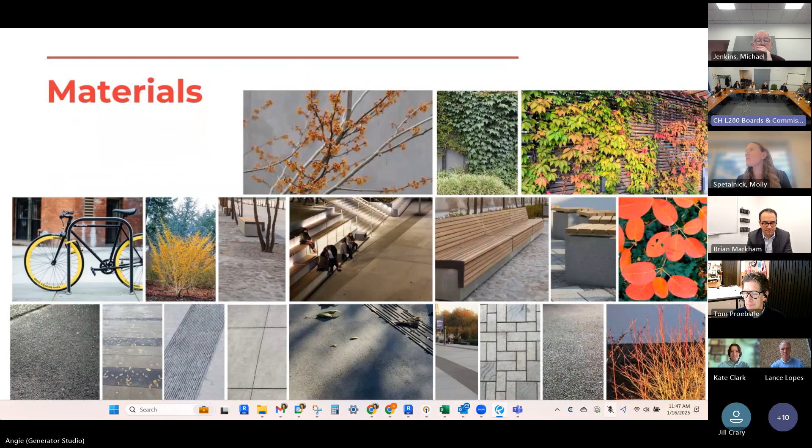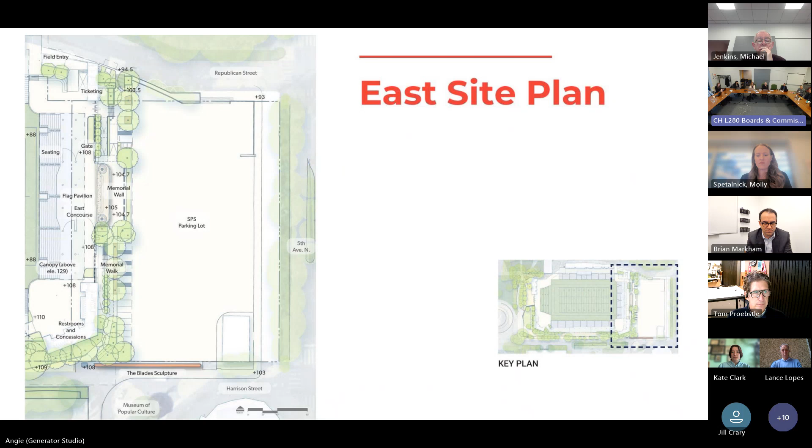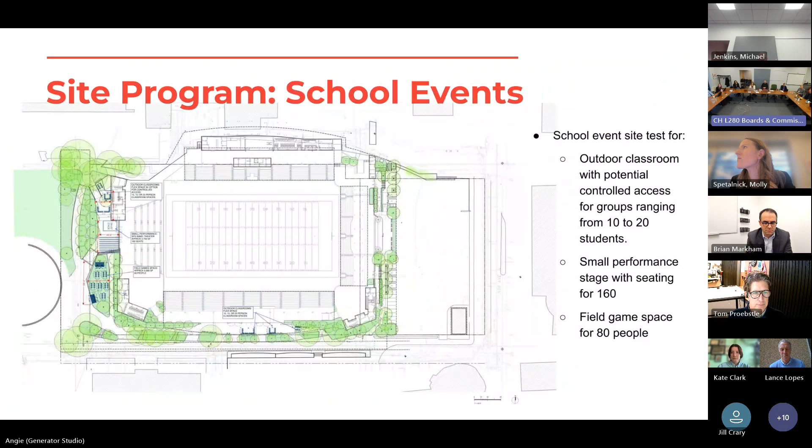That particular area, and I'm wondering if you can find a plan image of it, is doing a lot of heavy lifting. Entry and service, entry to McCaw Hall, the SDOT extents. So what we've got as an opportunity is installing street trees where there's space, given all of those curb cuts, which are zero right now. I just want to be completely transparent with you guys. So what we are doing, and you saw it in the rendering, is bringing vine walls around that. I think one of the things that's going to do, on a vertical scale, is soften that whole experience, and frankly do almost more than if we were grabbing ground plane, if you know what I'm saying. So I think this gives you a sense of what's occurring there.

Thank you, Barbara. Okay, two more quick questions. One is related to the sustainability elements you were covering. Are any of those visible to the public, visible to students?

Oh, I'm trying to think. Well, I'll just jump in and say, I think solar is probably the biggest one that will be visible. I think given the type of facility that we have and those canopies, solar becomes a very instructive one.

That is certainly something we heard from students, not just on sustainability, but even that idea. The solar will be on this whole roof that you see here. It will be visible from some point of the stadium. I'm really excited about the opportunity to drain the roof canopies into the planting beds, and that will be visible too. It's probably something we can play up as a learning opportunity.

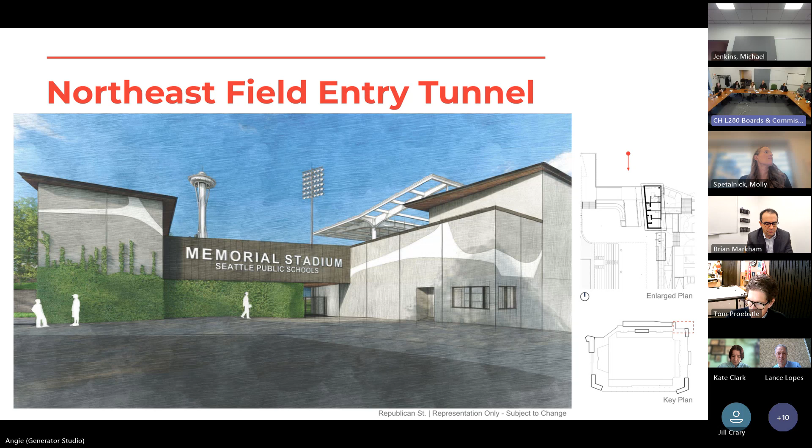So yes, the tensile structures are no longer on the concourses. Okay, great. Could you flip to, I don't know which page it is, maybe a few pages from where you are, maybe the northeast entry gate or the southeast entry gate, one of those pages.

Sure, this works. Actually, sorry, let's start somewhere else. Let's start with the west canopy first. I had questions there, and then let's come back to this one in a second. Or the Harrison Street canopy. Oh, I'm sorry.

I know you're trying to do a lot of things in these renderings, some of it stylized and some suggesting actual materials. Could you say more about the actual materials we're looking at? Is it painted white? Is it steel? Is it concrete? Just describe the architectural system we're seeing.

On the canopy itself, right now it is a steel structure, steel columns, concrete filled, I believe - like a steel tube filled with concrete. The structure above is a tapered steel wide flange member, all painted high performance coating in white. The translucent section you see at the farthest south portion of that roof is an ETFE material that allows transparency, allows UV to reach the landscape below, and offers cover without losing daylight in that corridor. We think it'll help make that feel like an active, uncave-like yet covered experience.

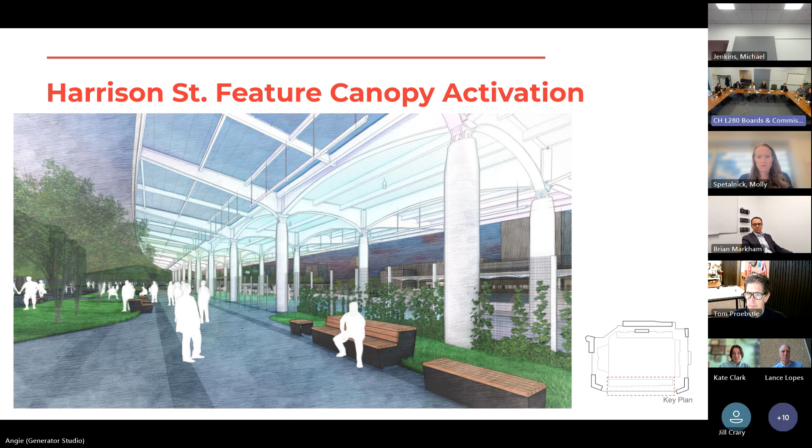Got it. Great. Okay, that's helpful to understand. Thank you. And so going back to one of your entry views, I'm sure you're all aware - I'm pointing out something you've, I'm sure, been thinking a lot about.

So what I'm curious about is, you have these entry structures that seem to have the wood soffit that some of your corner pavilions have. The corner pavilions seem to have a black steel edging detail around the wood soffit. These seem to have a white painted tube steel, I'm assuming, as the structure. Obviously, the canopies are a really strong architectural language with curves and round columns. These have different relationships to each other at various moments, so I was curious, not philosophically but specifically, how you all considered bringing these systems together - specifically the different types of columns, soffits, colors, materials - how do these roof features all relate together?

Good question. We studied several options, and one of them was developing a miniature canopy-like structure here. But the proportions and scale just don't really translate to this pedestrian level, and we felt it took away from the expression of those larger canopies to try to mimic it here at a reduced footprint.

So really, I think these are more akin to some of the covered structures you have elsewhere on campus that are minimal, offer coverage, yet are quiet architecturally - especially on this east edge where we want to not detract from the memorial wall itself. We felt it was important to have something easily recognizable as an entry portal, but not really much beyond that.

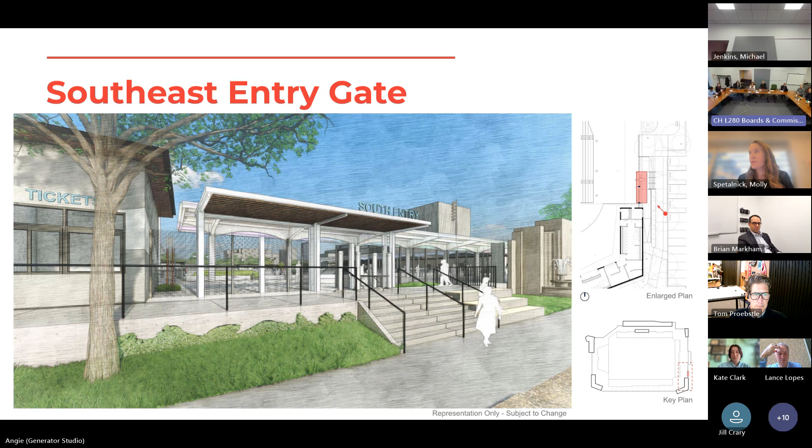That makes sense. So if you go to the view above this one, in this view we can see the canopy behind, the ticketing or building structures, and this gateway portal. It looks like there's a gap between them - in the northeast view, it seems to have a slightly different relationship. I was just curious how you were thinking through some of those relationships as well, how they come together.

Yeah, we do have a few instances where these structures come within a few feet of those corner pavilions, but they really are intentionally separated so that they don't appear as an extension of those buildings and stand alone as their own element. The placement was largely dictated by the site grading and how we could finagle the ramps and stairs and where these entries happen. I think it's a credit to the full design team, and Swift specifically, that it's all gelled together nicely for as complex as the grading is in these areas. So that's somewhat dictated where these entries can happen.

Barb, I don't know if that's fair to say. Yeah, so if you think about the memorial, those entries aren't perfectly symmetrical. But again, experientially, it's gonna feel pretty good. It's not gonna feel weird.

Great, thank you. I think that was— let me just double check my notes. I'm pretty sure that was all of my questions. I had similar thoughts as you, Zubin, about the lighting and some of the more transparent elements of the canopy.

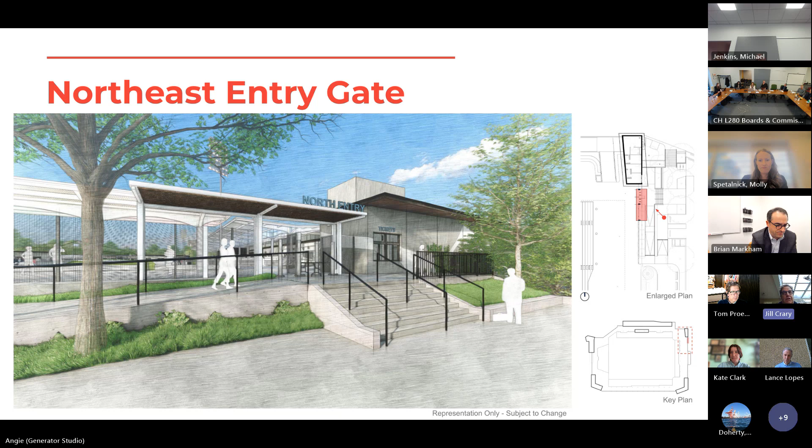Yeah, I'm really glad Zubin brought up the cafe, because I think he's right that that's a fantastic addition. And I applaud his enthusiasm for the hundreds of people that will be there on some days. But there's also hundreds of days, like today, when there's like nobody. So one of the most important things about anything succeeding there, and I would really love to see something succeed there because other attempts have failed, is the scalability of it. What I like is that there's a small component to it that probably can serve coffee to staff and the rare people who are there on rainy, gray days, and then it can scale up for the big events. I think that's fantastic.

As far as summing up architecture in general, it might be that because those precast walls are somewhat underdeveloped at this point in time, that we might recommend or condition a subcommittee to review that at a later date. I'm trying to figure out a way that we can see it again without slowing down or burdening the project. Although potentially if they're slowed down because of the sewer line, maybe that's not a problem. But I just wanted to throw out there that we should talk about what the mechanism is as well for how we want to move forward with that. Thanks, Jill, that's great. Okay, I'm going to keep us moving.

Engagement, were there comments or discussion on engagement? Just a quick repeat of what I had said before, of involving non-federally recognized tribes in any outreach around design for this project.